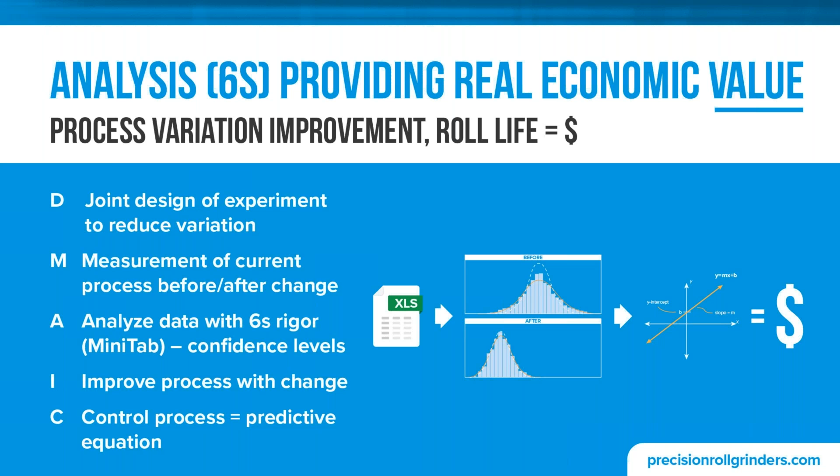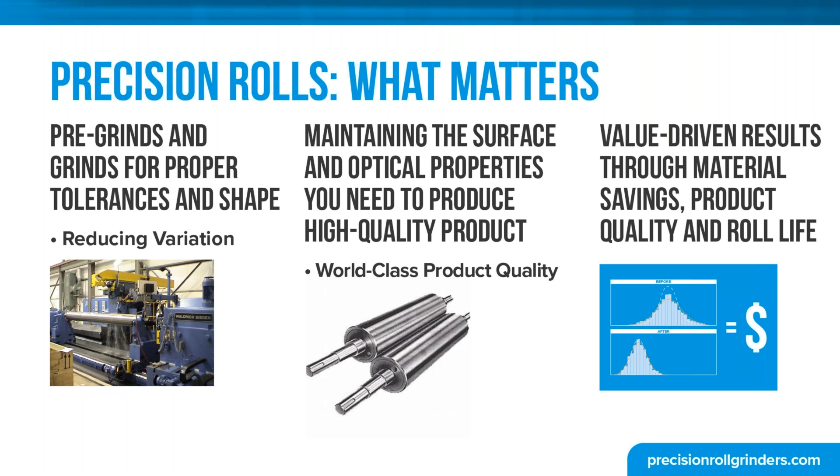Now, at Precision Roll Grinders, we focus on high quality precision grinding and roll servicing. We can reach tolerances in our grinds up to 40 millionths of an inch, which is world-class tolerances. On top of that, we have world-class surface finishes and optical properties, which often is overlooked, as the RA, or your surface finish, is just as important as the roll geometry or the grind. And using these quality grinds and surface finishes, again, we want to look at that data and show how that is helping your process.

One of the defining differences of Precision Roll Grinders is that we grind our rolls on the journals. We remove the housings and the bearings and take all that error or play or the clearance in your bearings out of the equation, which when you're looking at the tolerances that we grind to is extremely important. This shows a perfect example.

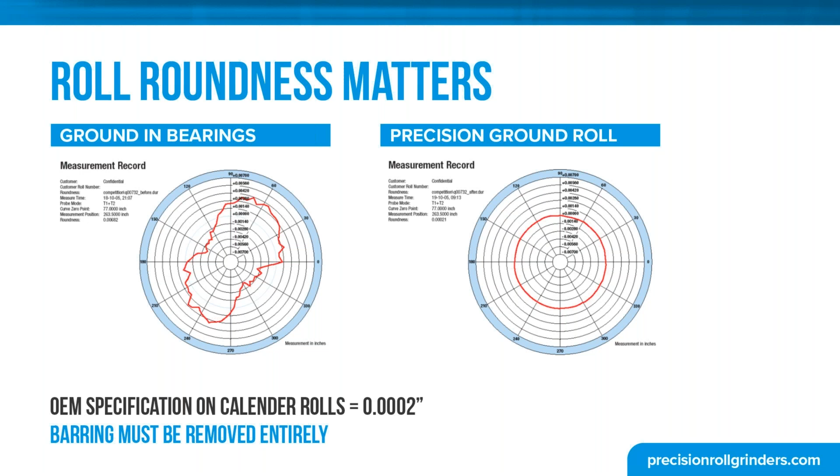You've got an extreme example there on the left of a roll that was ground on bearings. And you can see how much variation in the roundness of the roll there is. Whereas you can see when it's ground on the journals, you have almost a perfectly round roll. This also helps remove barring entirely, which is very important, and we'll discuss here later on why that's important.

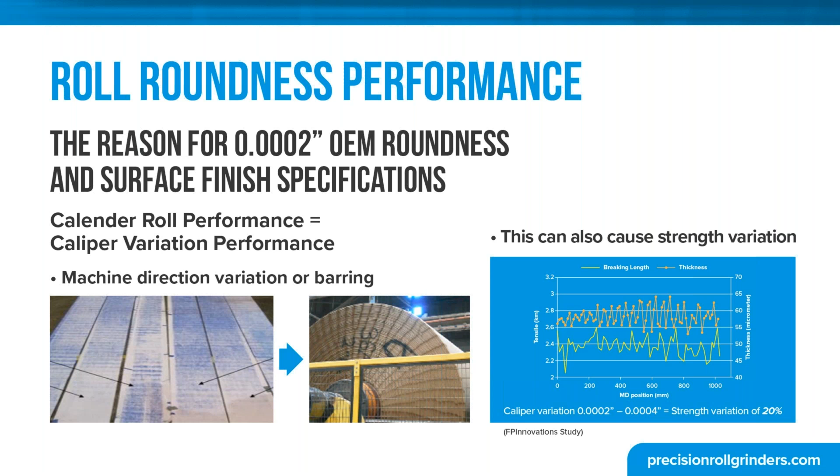So this shows a perfect example of why barring can be such a problem, and it's critical to remove it. There on the left-hand side, you can see impression paper, where you can very much visualize what the barring is doing. This is creating machine direction variation, and there in the middle picture, you can see the result of what that does in the corrugation and reel spool at a paper mill. This can also cause a huge amount of strength variation, and as a result of that, you have additional scrap and other detrimental items.

Crowns are critical on rolls as well. This applies to any industry with a crowned roll, not just paper or one industry. This could be plastics, rubber, or anything else. When you're looking at the crown on a roll, in a perfect world, when that roll is under load, you should have a uniform nip all the way across from front to back on the machine.

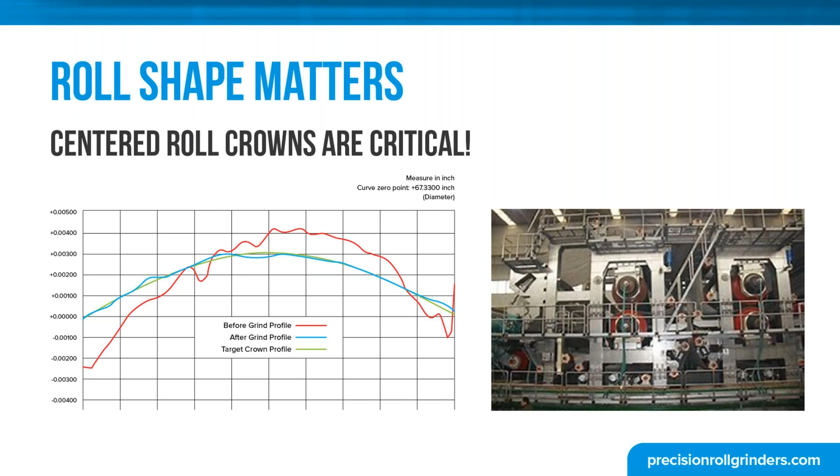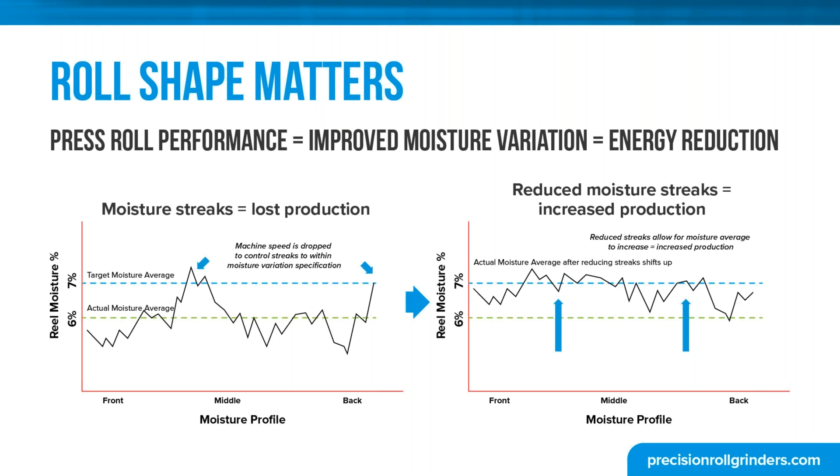And after, you can see the moisture average was not only more consistent, but actually bumped up slightly. This can help increase production, you can increase machine speed, and you also don't have to worry about evening out those moisture streaks in the dryer section, as that is a huge energy problem.

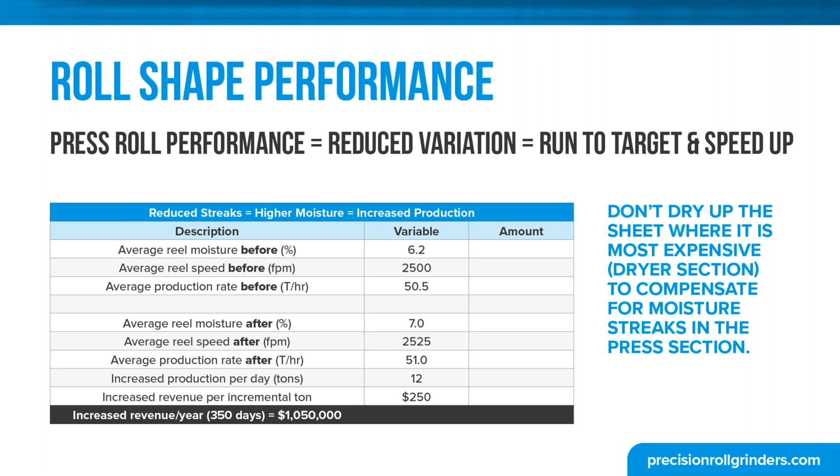So these are some of the numbers you would expect to see from before and after. You can see there's an improvement in the reel moisture, there's an improvement in the reel speed, and as a result, the production rate is also increased. And the numbers speak for themselves. You can see you're going to have increased production. That is costs that you're wasting if you're not able to achieve those numbers. And again, you don't want to be drying the sheet in the dryer section as it's incredibly inefficient.

Another thing that PRG focuses on is concentricity. This is something that a lot of times is overlooked, that's not focused on. And concentricity is just as important as any other aspect of the roll geometry. If you have poor concentricity, you're going to see an uneven sheet, you're going to see material losses, and you will see a shorter roll life. And so that's something at PRG we really focus on, to make sure your grind is concentric.

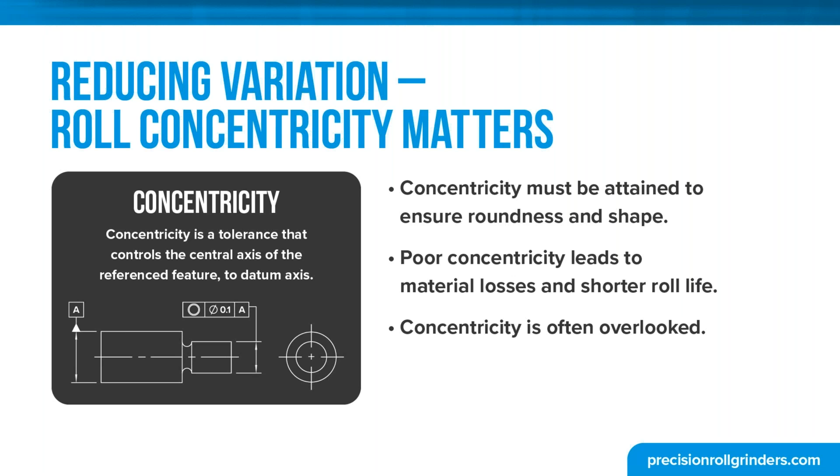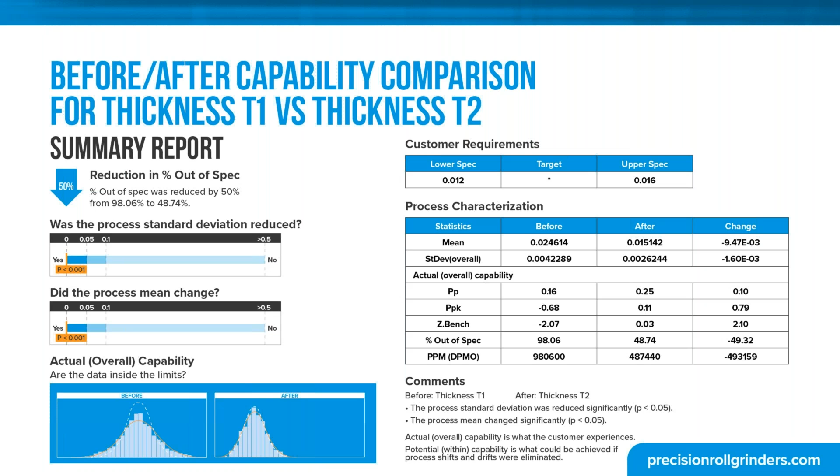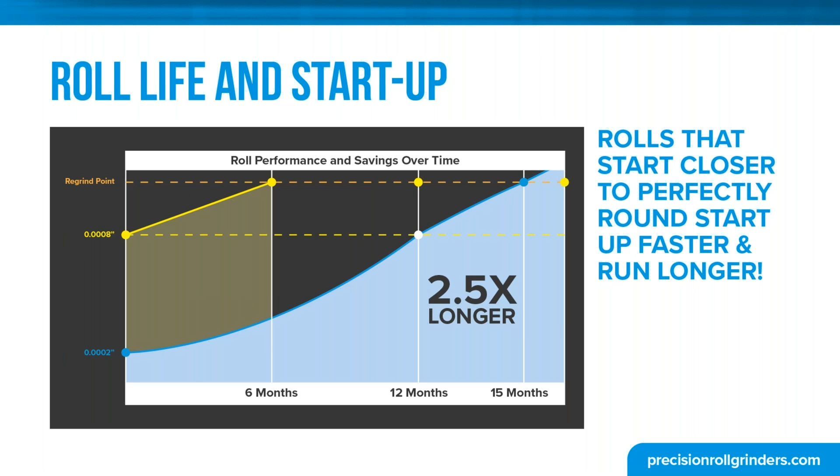If you put a roll in that, in this case, is only 6 ten-thousandths of an inch different, because it doesn't have those high tolerances, the moment you start running it in that machine, it's already wearing at a higher rate than if you had a lower tolerance. And as a result, in this case, you can see it made a massive improvement, taking the life of the calender roll from 6 months to well over a year.

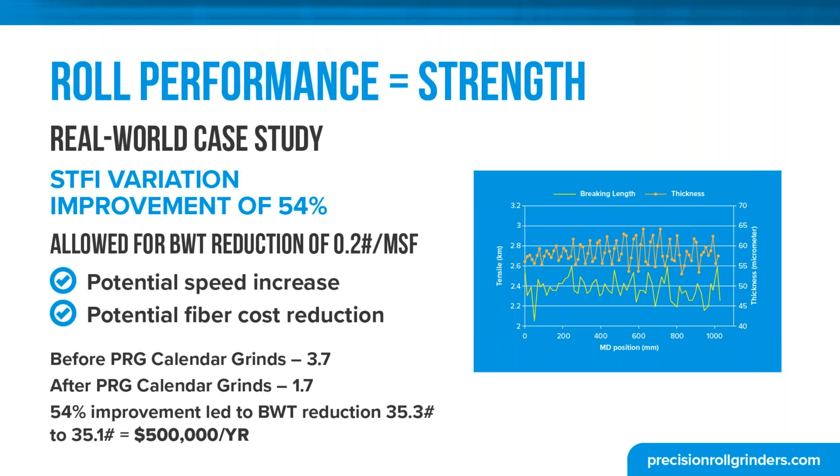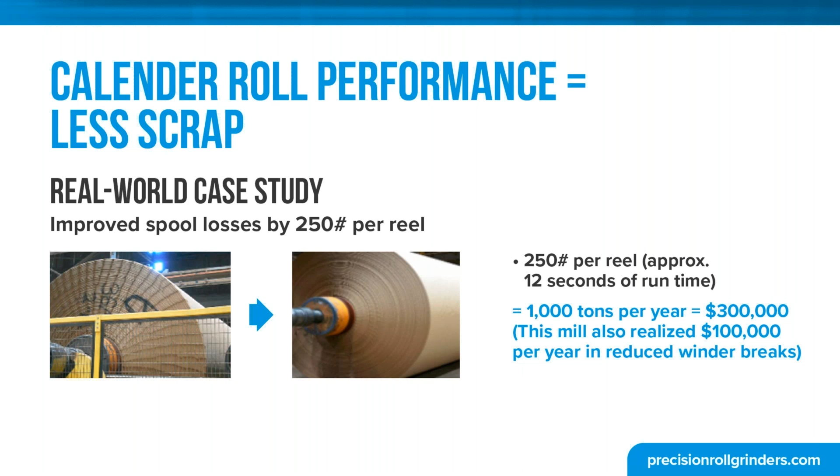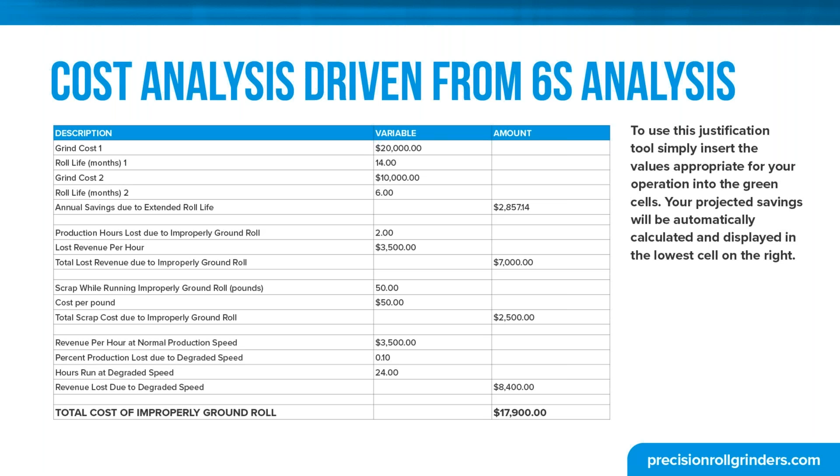Another thing we work with our customers to do is to create spreadsheets to come up with estimates of how much savings we could offer them if they used our product or are currently using our product. This is an example of it, and all of these spreadsheets are tailored to specific customers and whatever their process is. And we will work with you, sit down with you, and figure out exactly all the different elements that would go into this. There'd be material losses, time wasted, et cetera, and we can put together a specific spreadsheet for you just to estimate your return on investment or how much you might save over the course of whatever time period.

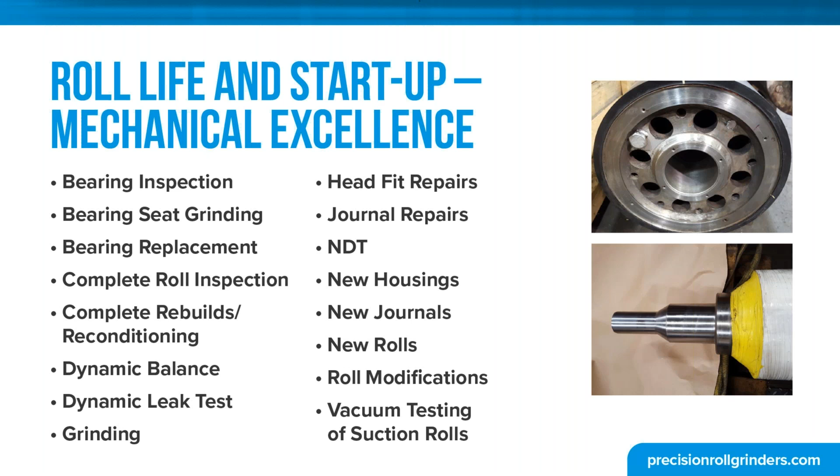So at PRG, we really focus on the mechanical excellence. Again, we are not just grinding, we are a full roll service provider. And so this involves going through the bearings. We have individuals from the OEM bearing companies come in and inspect your bearings to make sure they are within spec before they go back on your roll. If they are not, then we will recommend replacing that bearing.

Bearings are extremely important, and if they are not inspected properly or you have a problem with it, that can take down an entire production line or machine in a split second because of bearing failure. So it's very important that all the mechanical aspects of a roll are inspected and verified before they are serviced any further.

We replace damaged bearings and bushings. We have the journal repair and replacement, which I mentioned before. And as a result of this, we also can get your production line started up and running quicker. We have expedited roll service, and so we can get you up to speed quicker than anyone else.

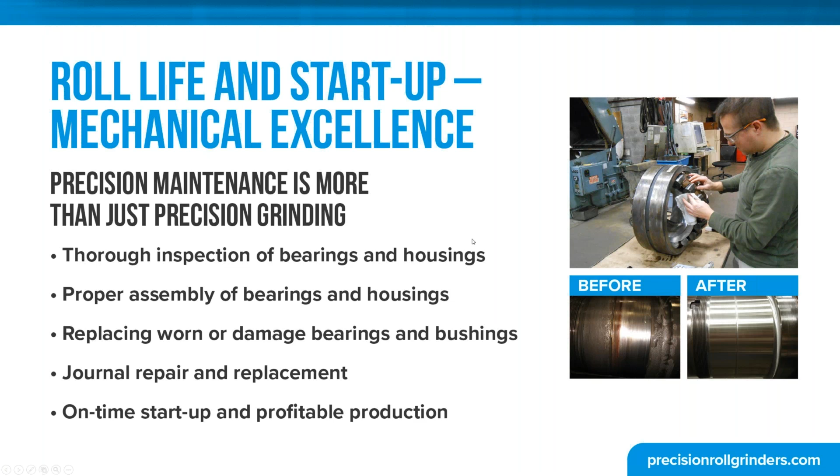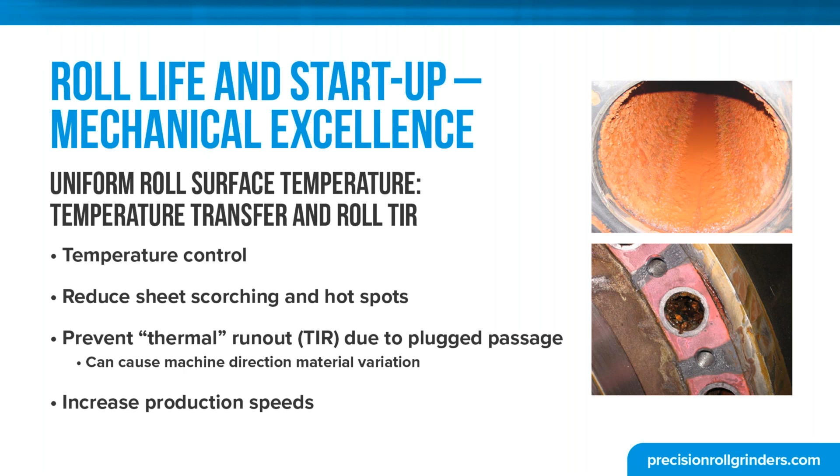Now, obviously with COVID, we've had a lot of time to adjust to our new virtual partnerships, as we call it. It's much harder to see a lot of customers face to face. We're all getting used to GoToMeetings and Skype and this online contact because we can't see each other face to face. And so we're really trying to work with our customers, especially the ones we can't see face to face, to keep helping you as much as we can without being there on site and to see what we can do for you.

Now, going back to the application engineering, as a result of COVID, we started offering virtual value-added services. This still entails the same rigorous and in-depth Six Sigma process that we use, but we have to collect the data or the samples virtually. So we will work with customers to collect the samples. They could send us samples, and then we do the measurements on them, or sometimes it's just a data set that a customer already has, and they can just send that over to us, and we can do an entire analysis without actually having to be there in person.

And on top of that, with all our account managers, we work with all our customers one-on-one via pics, video, and online calls, where we can try and troubleshoot a problem via just pics or video since we couldn't be there in person.